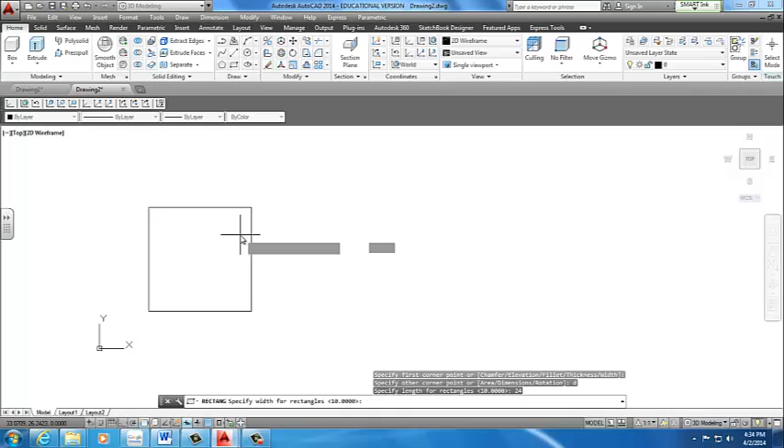Before we get started, I'd like to create a dimension of what size I'm looking to make. Most mirrors are about 24 by 24. You can go bigger or smaller. So we're going to work with 24 by 24, or you can do 30 by 30. I'm going to do a rectangle command, D for dimension, 24 by 24, and that gives me an area to work with.

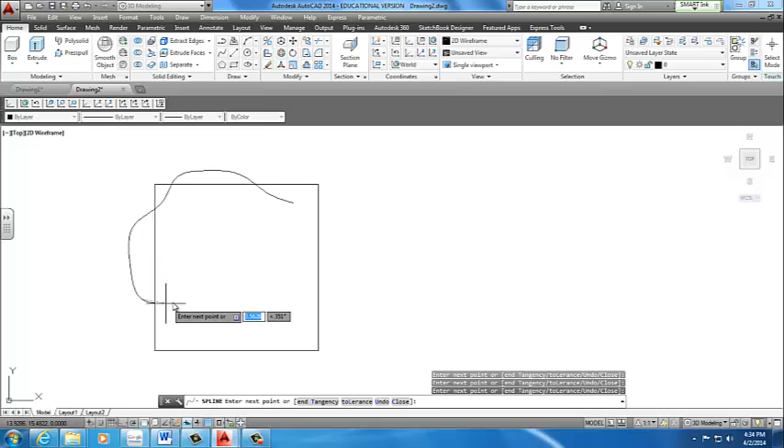Now I can go outside this area or inside this area, it doesn't matter. But using spline, I'm going to create a design with ortho off, because that's the best way to use spline, with a cool, unique design. You can make it in different shapes, even to your own liking. And I created this shape.

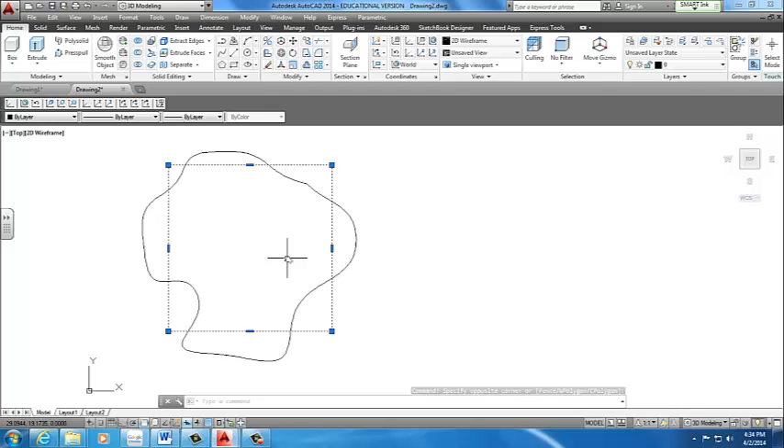This would be my mirror. It's a really different shape. I'm not sure if I'm going to like it when it's finished, but it is an option. So I'm going to delete that reference rectangle. I have this spline set up, it's one piece, and I'm going to need that for a few different things.

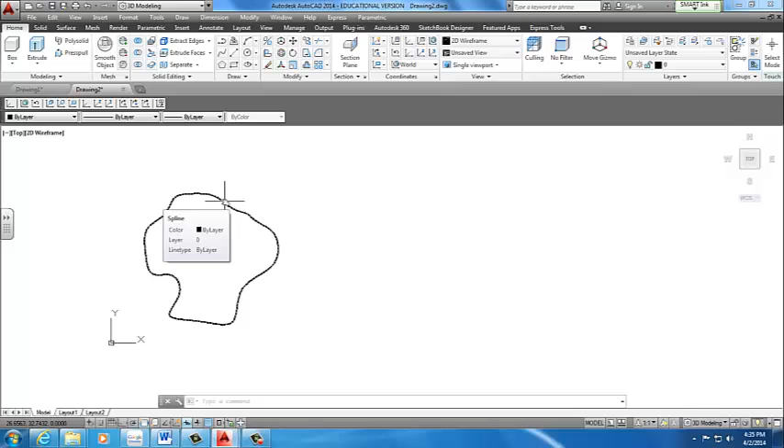We're going to extrude this area. We're also going to use that line as a reference to sweep a channel, a metal channel that's going to protect anybody working with this mirror. Now this metal channel has to fit this mirror, which is going to be about 1/8 to 1/4 inch thick, based on your design. So we're going to create a U-shaped channel.

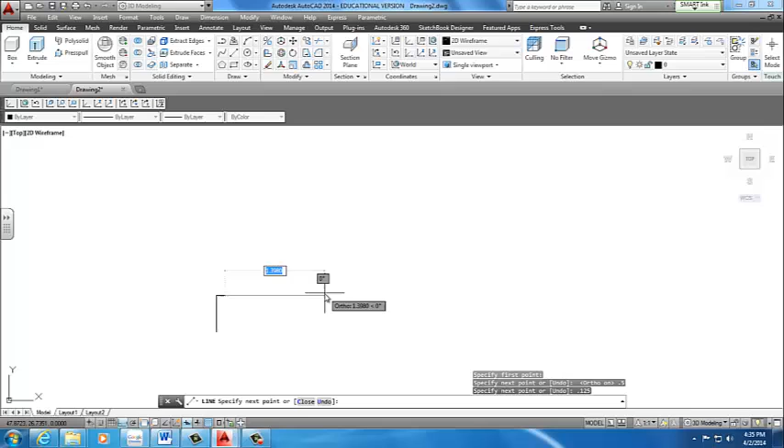Basically it's going to be a line going upwards using ortho. We're going to go about 1/2 inch. We're going to go across the actual thickness of the mirror, which will be 0.125, which is 1/8. And we're going to go back down 0.5. We're back down at this point.

So this is basically the shape we're looking for with the sheet metal. We can have it square shaped like that, but that's really hard to come by. Usually it is rounded, easier production, because it's going to be extruded metal. So we're going to give it some fillets here at the edges.

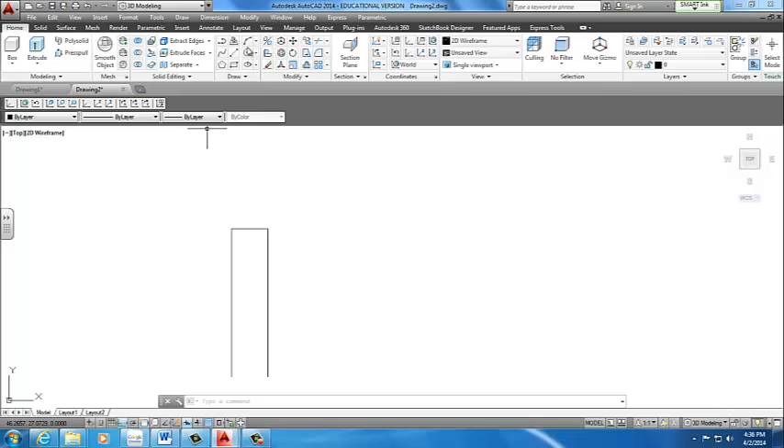Use the fillet command. I'm going to go, let's see if I can do 1/32. Actually, that's going to be too small. So let's do this again. Radius 0.0625, so 1/16.

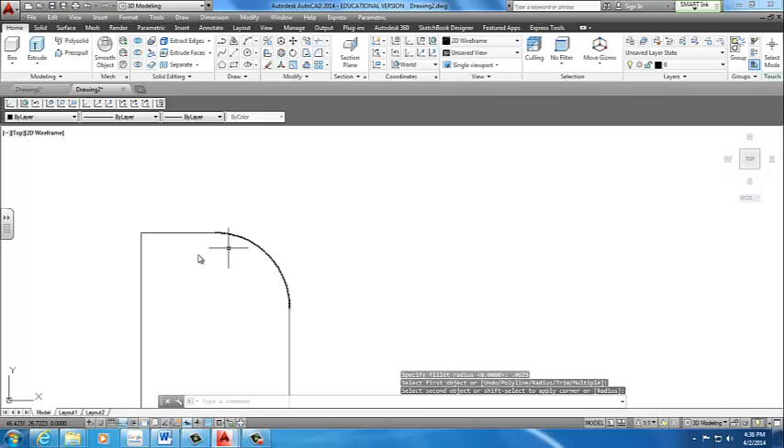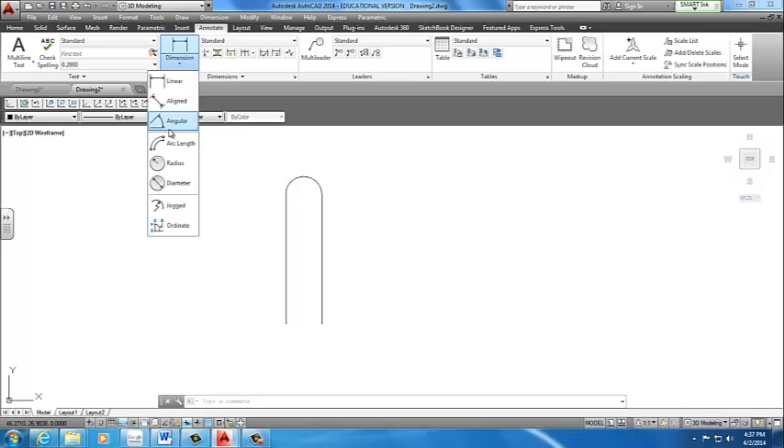That should close that up and create pretty much a loop around here. Now we have to use these lines to give it an offset, to give it a thickness. We're going to use an 18 gauge metal. Before I do that, I want to make sure you guys got the information correctly, so I'm going to give you the radius here, 0.0625, and I'm going to give you the dimension here, which is actually 0.5 total.

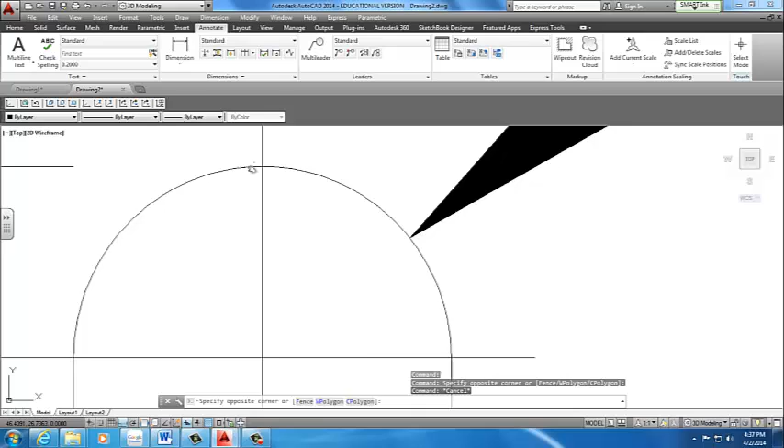So the mirror actually will be inside here, so what we need to do is offset these three lines. Actually, we only have 4 lines. I'm going to offset it 0.0478, which is 18 gauge steel, just about. You can never get it perfect, but that's as close as we can get. So we go offset 0.0478. We're going to offset out, like so.

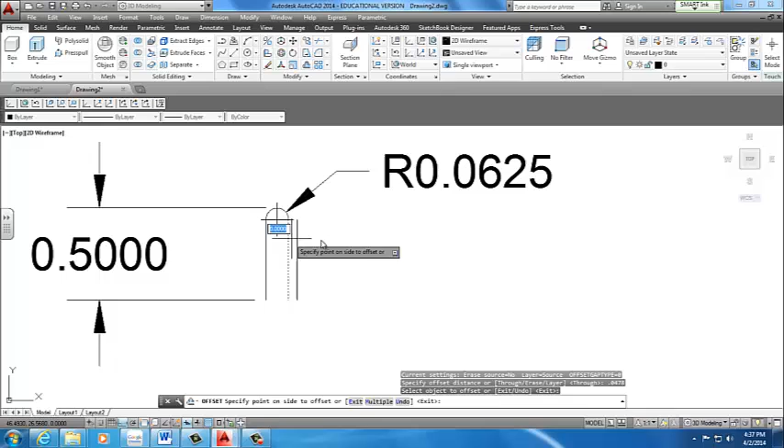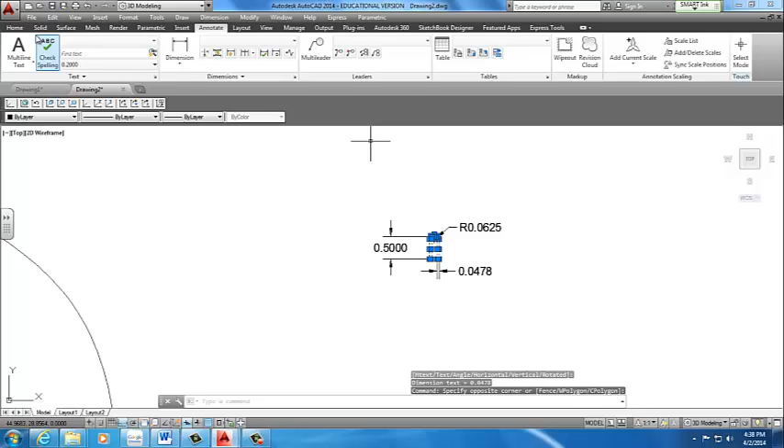And we got to close the bottoms. So I'm going to put that dimension in there for you guys for the thickness. So it's 0.0478. I'm going to leave that as is, as a reference. I'm going to make a copy of this. And we have to do the p-edit option, or we can do region. We'll do both actually for this project.

P-edit, which will make these separate lines one piece. We'll type in M for multiple. Select entire object, enter. Do you want to convert these to polylines? Y for yes. We want to join it. Join, enter, fuzz distance 0,0, enter. So we have one single piece.

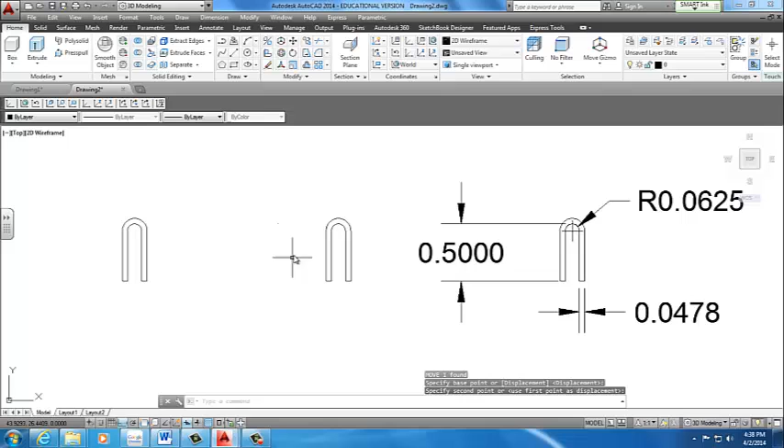The other way of doing it, which will be a lot faster, is if you go to your draw menu bar, you go to region, or you can type it in, select the object, and click enter. That creates a region. Yeah, I don't know what this dot is here. It's alright. So we have both of these, which is great.

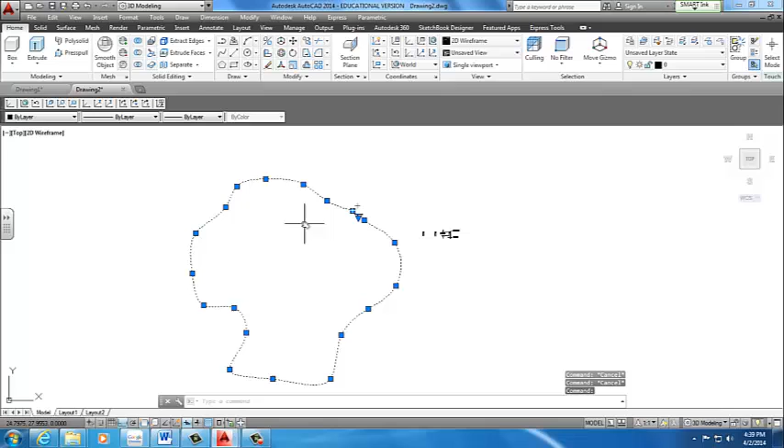What we need to do next is we need to revolve one of these items around this path. That's going to be our mirror. It's best to have this copied. So I'm going to take this mirror, I'm going to copy it over. But what I do is I copy it a specified distance. That way, once I have the mirror extruded out, I can move it back into position without a problem.

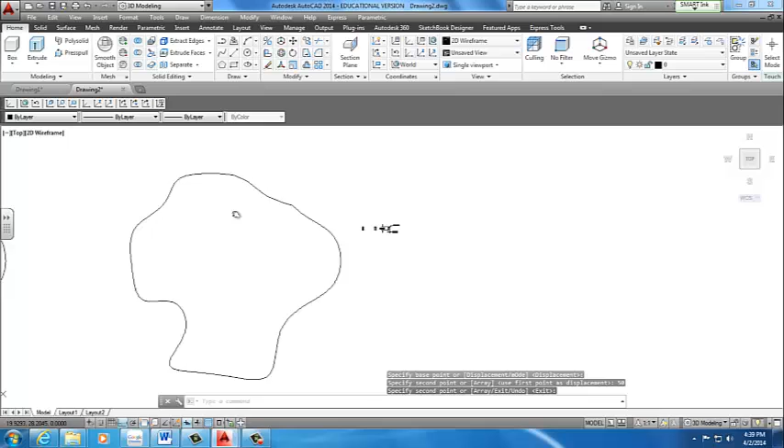So I'm going to copy it over 50, some number that I can remember pretty easily. So I have that copy. I'm using this design as my sweep, and this is my object I'll be sweeping.

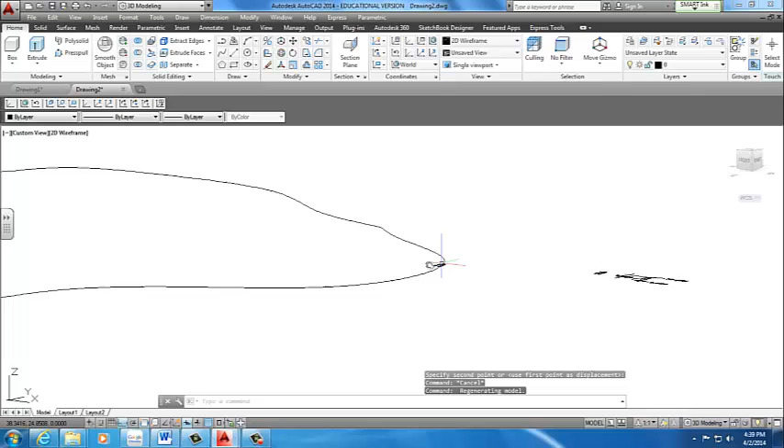So to do that, I need to move it somewhat closer to the object so I can get a better understanding of how it's laid out. And what I need to do is revolve it around, 3D rotate it, to make sure it's going to follow the sweep the correct way, so it won't sweep sideways.

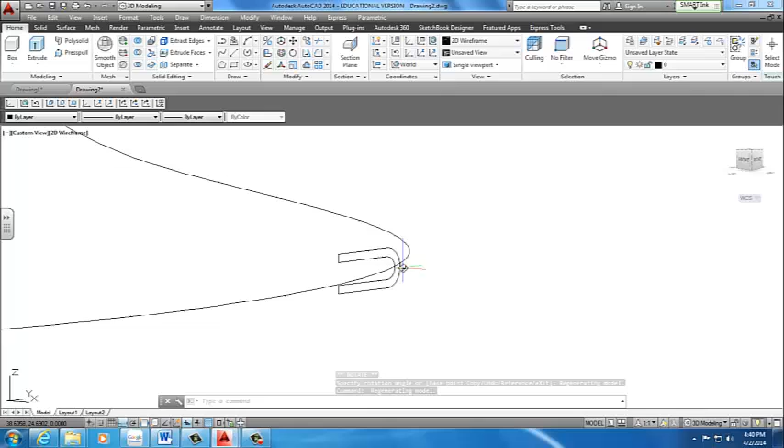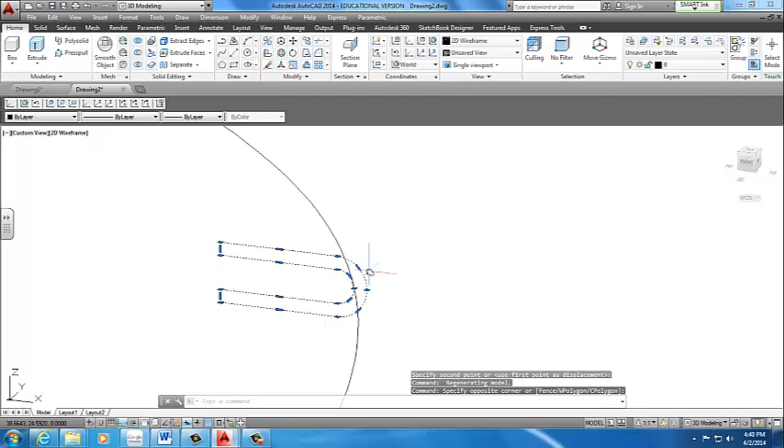It's hard to say than show, so I'll show you in just a bit. I'm rotating it around to a position where I think it will follow the whole path around the object or the mirror. Now, your mirror will not be all the way to the end. It will be somewhat away from it because you can never get it to the edge, plus it will cause friction.

So keep it somewhat close. You got to play around with that a little bit. Next we want to use the sweep command, going from extrude to sweep. We select the sweep path, or select the object to sweep, then click enter.

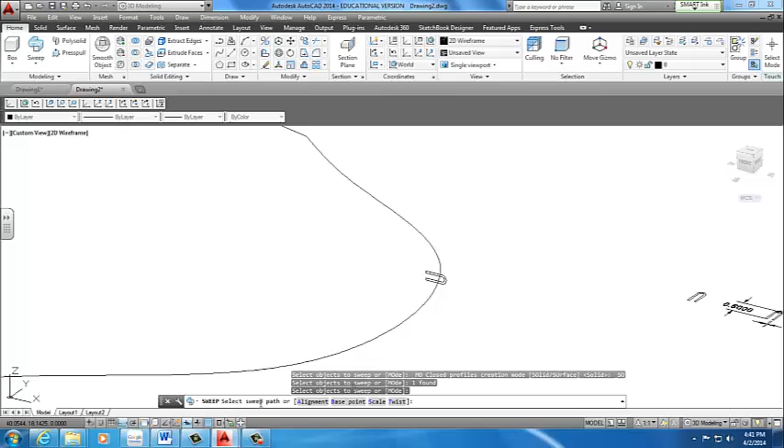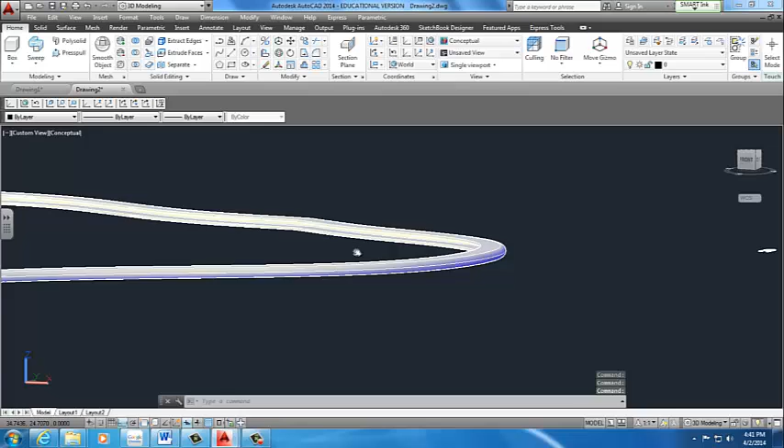Let's test it with the path as is. I'm selecting the path, hoping my computer doesn't crash, and it creates that piece. Now if I change the visual style from 2D wireframe to conceptual, you can see it was correctly swept around, creating a little gap where I can put my mirror.

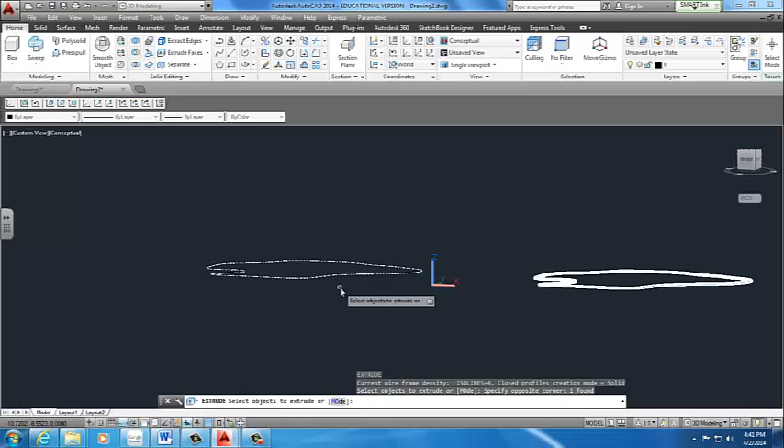Now the thing with the mirror is I'll have to extrude it both ways. So if I move it back, it's actually in the center of my channel. To do that, I do extrude, copy, and go down.

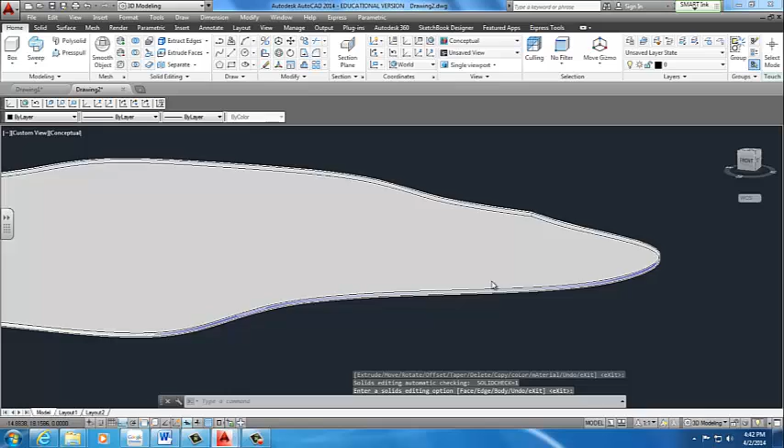0.0625, that's 1/16, and I'll do the same thing but extrude faces to the top plane, also 0.0625. So the total thickness is 1/8, which is what I need, extruded from both sides, up and down.

Now if I move that back to the original position of about 50, which I wrote, it goes right into the pocket sleeve that holds it. So that is basically the mirror.

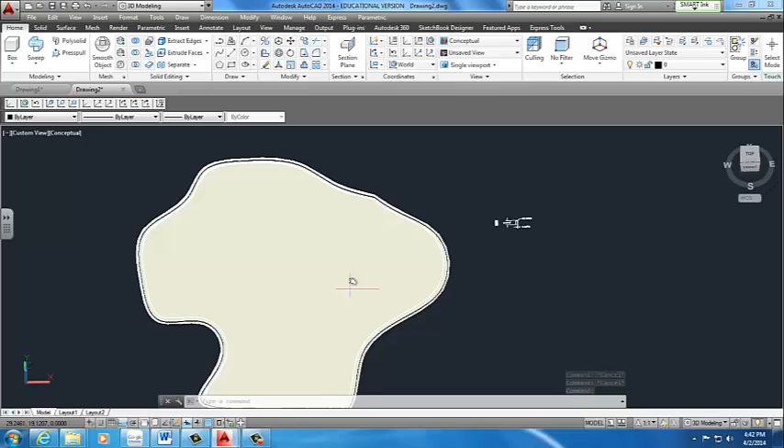Now once you have this established, to make this actually possible to produce, there are a few things the manufacturer will need. You can't dimension the weird spline shape for them to figure out by ruler. So they would take your AutoCAD drawing and take the outline of the mirror.

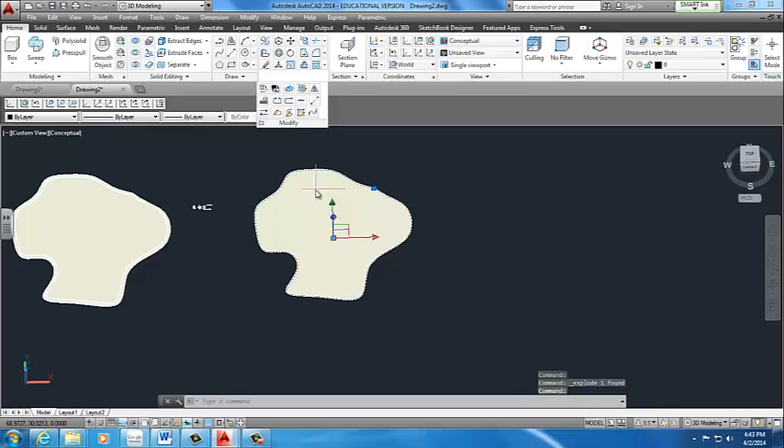Let's make a copy of that. Should have kept the outline, but I don't have that, it's all right, I can just explode this. Remove these parts. I think I need to explode it one more time to get back that line I needed. So to take that outline, I explode it and delete one of these, so I still have that line.

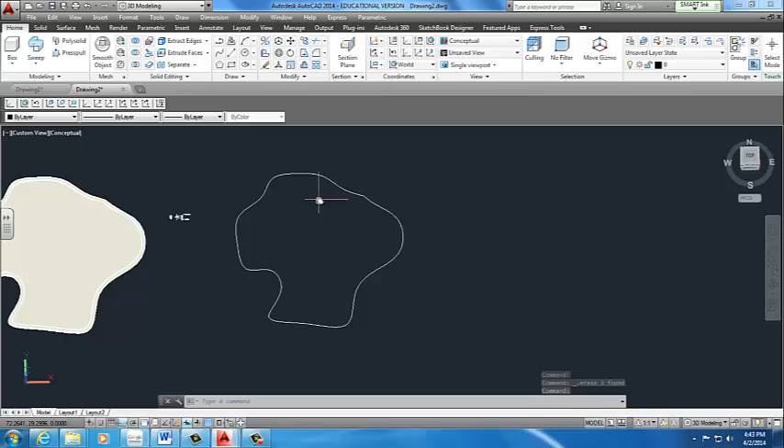So they would take this and use a CNC machine to cut it out in glass or in the mirror directly. Once they have that, or they might print it out, lay it under the mirror, and just cut it out using a glass cutter. The other thing is they need this information.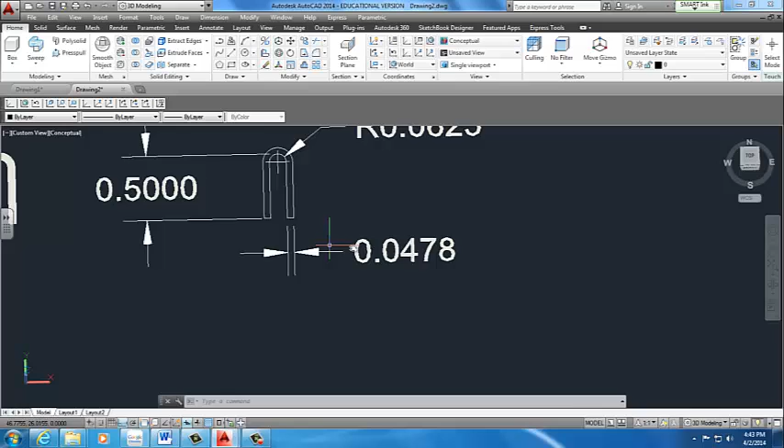As you can see, I have a drawing documenting what it is: the thickness, the total size from the inside ID. You have to specify the dimensioning that these are IDs, even though it's clearly shown, you still want that extra information in there just in case.

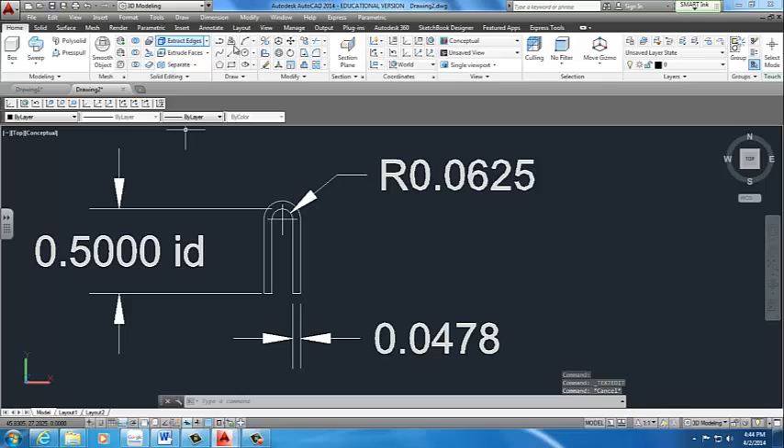And you also want the ID, which is inside dimension, and OD, which is of course outside dimension. So we place the inside dimension because that's our critical information. We don't mind if the outside is bigger or smaller as long as our inside is to that size.

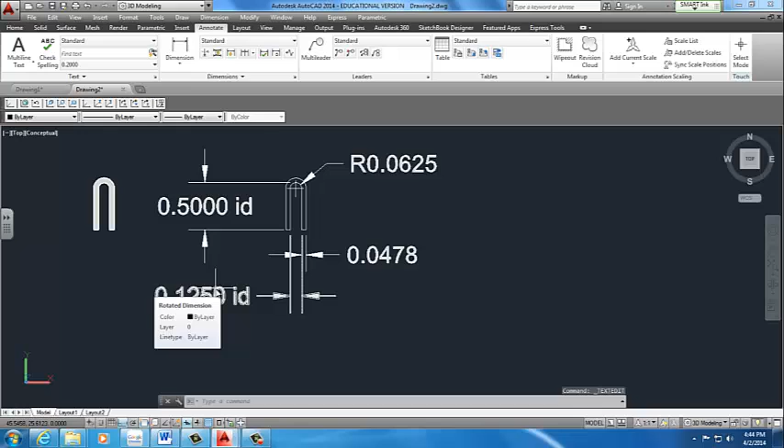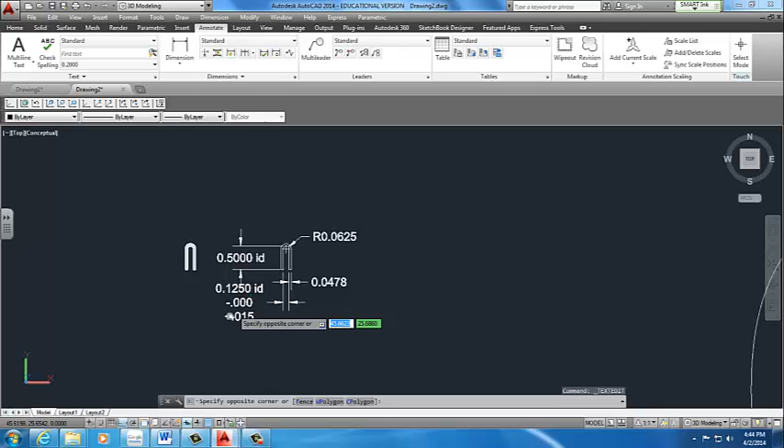And they might not be able to get that exact size, so you can specify even the tolerance. The tolerance can be minus 0.0, so it doesn't go any smaller, but positive 0.015. That's our tolerance. For the other part, this OD can change, it should not cause any issues with our mirror as long as we have that ID.

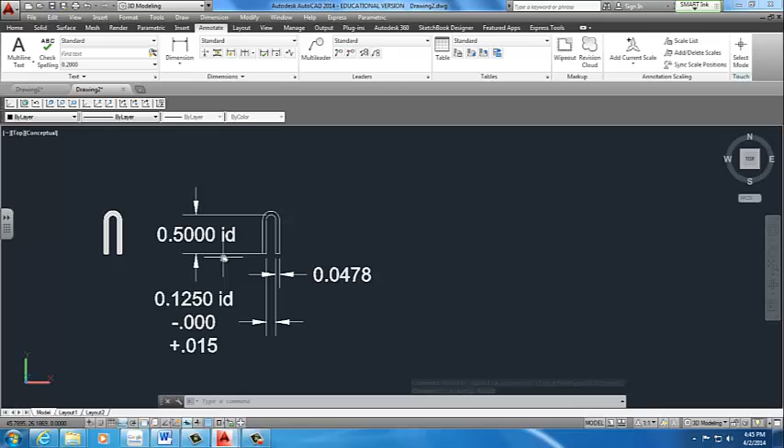The radius actually specifies the ID, but you might not get that, so we can remove that radius to make it easier for the manufacturer to make this object for us. So he knows what material, what thickness, what depth and what width we need. We can specify the tolerance of the metal if needed, but it may not be required. Like for this part, we don't care.

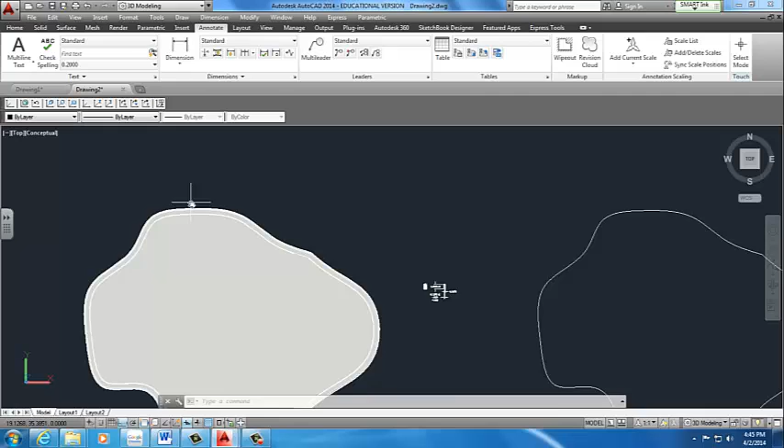The only issue we need to resolve with the mirror is how to mount it onto the wall. I'd probably recommend using a metal clip with a high intensity glue that would hold it up, or they could weld on a tab and connect it to the wall.

That's another option. But as long as they have this information detailed in the template, specifying what thickness this mirror is, because if they go with a thicker mirror, we can't go with this ID. So you gotta keep that informed, specify what it is, and that's pretty much it.

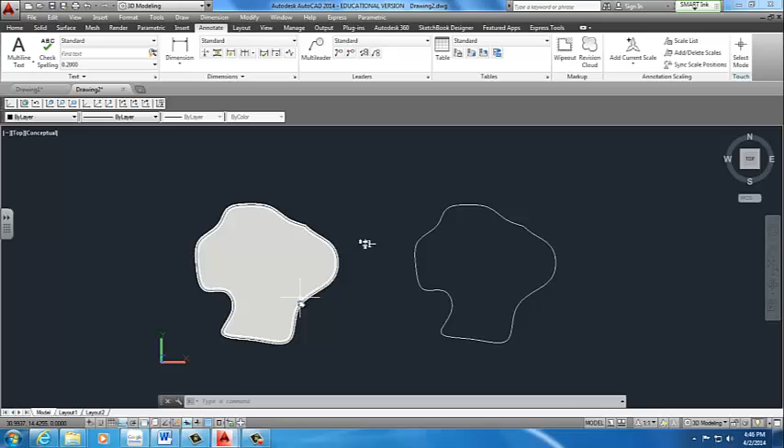Once that's complete, the manufacturer can give you a quote on how much it would cost to create this mirror. The way they would create the channel is they would have the mirror done, and the channel would be slowly bent into that shape, following that path, which is probably harder than it looks. So that's how you do a custom mirror.